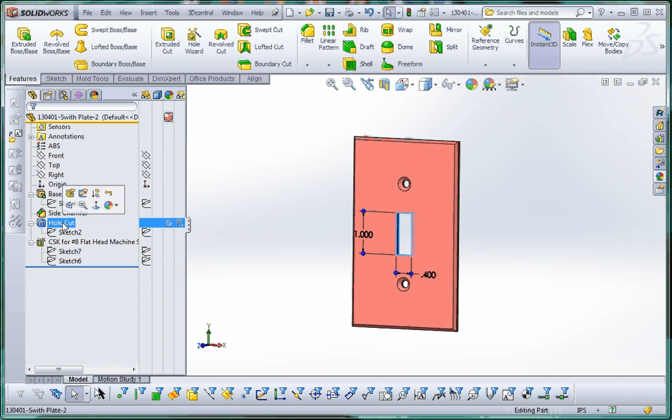And what we've done so far is we had our base, we had our side chamfer put in, our hole cut, which is going to be there where the switch actually comes out in the middle, and then we put in our hole wizard holes, which help define some of the holes and the screws that are going to be associated with those holes when we finally get this mounted.

What we need to do next is we need to hollow this out a little bit. It's always good when you're dealing with plastic injection molded items that there's a consistent wall thickness. That way it cools correctly and it doesn't provide as much in the way of warpage. So one way to do that is the shell feature. It's a very handy way of doing it.

What we're going to do is we're going to select the face and give everything else a certain wall thickness, excluding that one face that we select. So if we go to shell, by default it will go to 1/10 of an inch. But we're going to change that to 50 thousandths of an inch, or 0.05 inches.

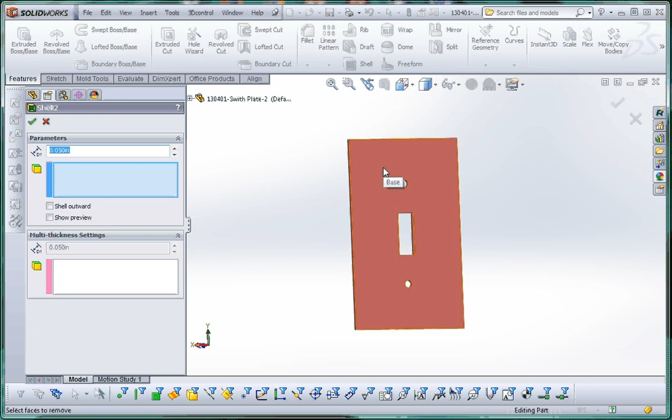The way you do it is you work your way from the top down to the bottom. This blue box, as you remember, is asking for a selection in our modeling area. So it's asking for faces to remove. We're going to take this face and we're going to remove it. And you'll see that there's an icon on our mouse.

If we right click on the mouse button, or go over here to the green check mark, it'll rebuild for us. And what that does is it shells out everything except for that face. So anything that protruded in that face gets a wall thickness, including our hole wizard holes and that center hole that we have for a switch, as well as the edges over here.

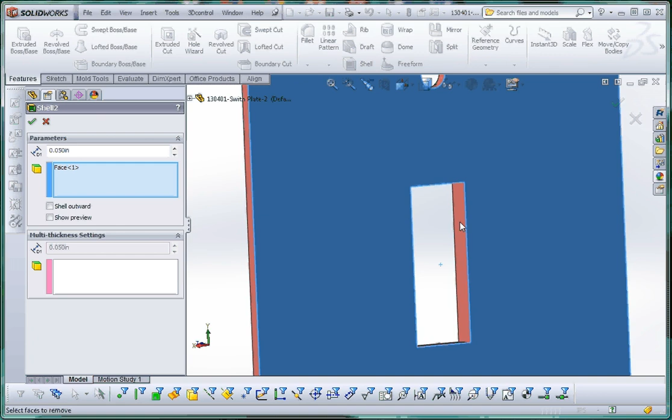Now, if we go back to this shell and kind of play around with it, we can select different surfaces in here. Not only that face, but we can maybe select this face, this face, this face, and this face, and maybe this edge over here, and see what the results are going to be. We go to the green check mark, and it kind of does what you would expect it to do.

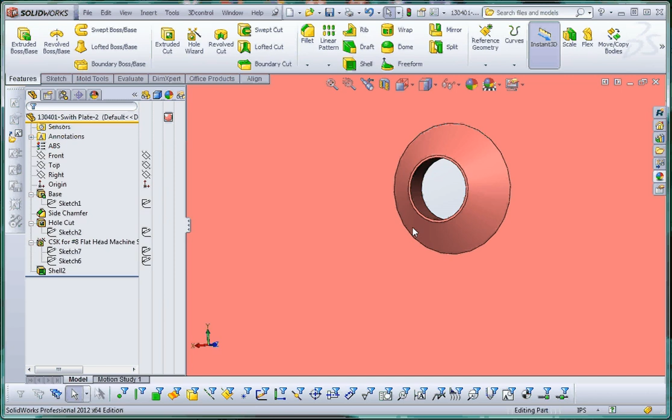It provides no wall thickness over here. It's just a straight through hole, and it only provides a short wall over here. It provides a kind of a wall thickness to the cut that we had there, all the way down to that point. And then down here, it gives us a full wall all the way through. In fact, that wall surface goes all the way up to the front plane, because remember, front plane resides right on that face, this face, and that face over here.

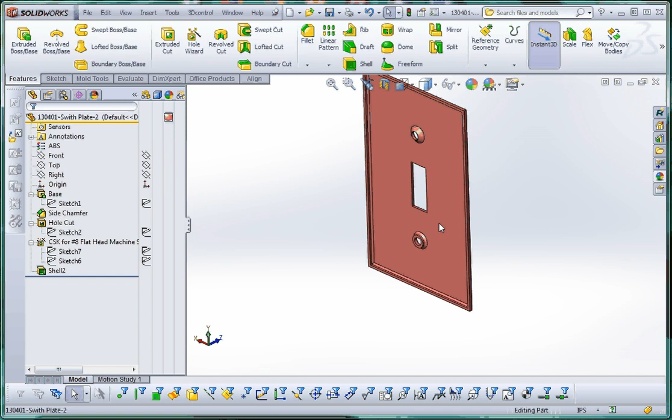So we can go back to the shell and change that one more time, just for the fun. Let's go ahead and remove one of these faces on that switch plate, and go back to rebuild and see what that looks like. Oh, I think we removed the wrong face. We want that face. So let's go ahead and reselect these, but not select all of them. Let's just select maybe those two over there and see what happens.

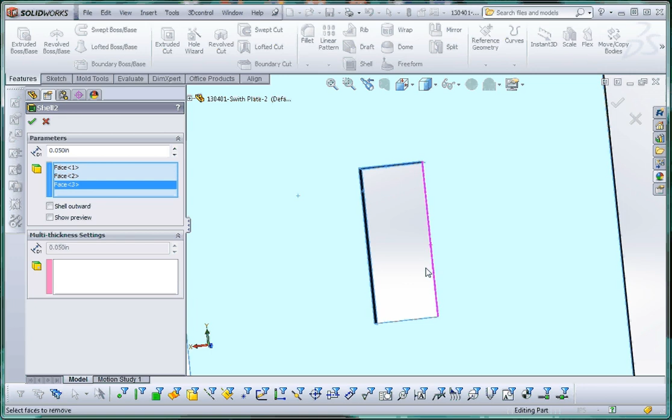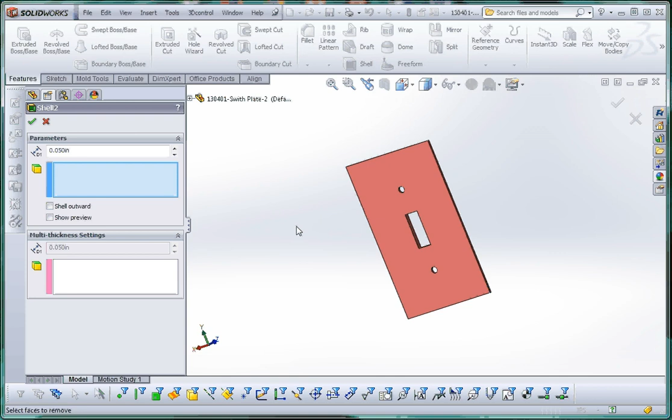Yeah, so kind of predictable. It does have a wall thickness on two sides of that cut in the middle, where that switch is going through, but nowhere else. The shell will provide you with various different options in here. If you want to clear some selections, right-click in that blue area, go to Clear Selections. Let's go ahead and reselect that and go back to our original setting. So last thing we want to do is we want to put in a rib.

So what we want to do is kind of put in a rib feature in here that'll go between maybe this boss over here to that cut, and maybe from this hole cut down to this boss, and then from this hole cut over to the edge, and the same thing on that side. The way the rib works, it's based on sketches, but you want to make sure you do your sketches first. So let's go ahead and do this.

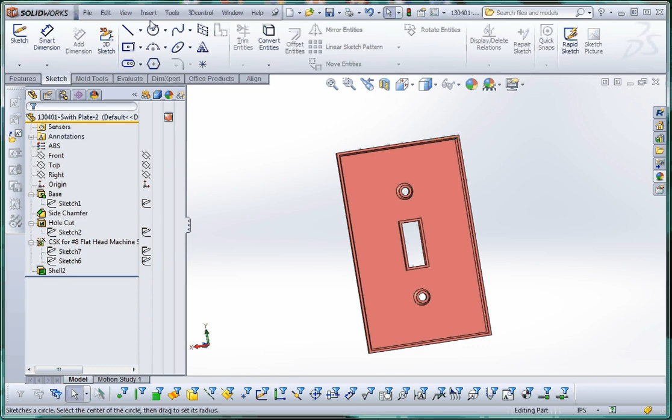Let's go to the Sketch tab and go to the Line command, and we'll just start drawing in some elements in here, some sketch elements. Now, there's a couple different faces we can choose. We can choose this face, or that face, or that face. It's all the same face, or we can go over here to our Feature Manager flyout and click on the front plane, because they're all about the same. They're all the same surface. They're all coplanar with each other.

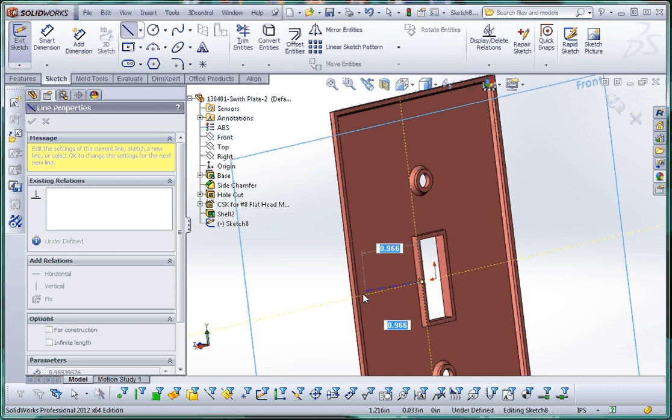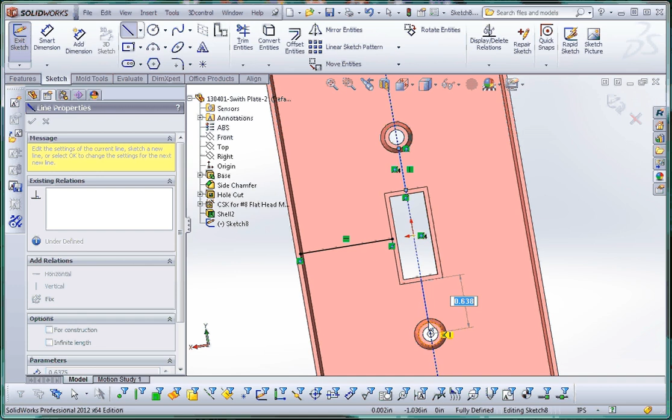So we can choose face or front over here, and we're just going to start drawing and sketching in some of these lines. We can use all existing geometry. For instance, we can go from maybe the midpoint of that rectangular cut, that hole cut as we called it before, and go up to that edge of that circular feature. Again, we'll do the same thing on the bottom. So we'll go from the midpoint of that hole cut, and we're going to come down here to that edge.

You can't really see that very well, but when you're making a pre-selection, when your cursor is resting right over that edge, it's going to turn orange and let you know that you're going to be selecting that. And we can establish that relationship down here too. You notice that right next to that, it's going to be hard to see, but in yellow you have a suggested sketch relation which is going to be created when you finally drop that line into place.

So if you think about these lines we've drawn in, we haven't drawn any dimensions in here, but the lines are fully defined. They're fully defined because the element that's just below that is fully defined too. And that's fully defined, and you put your elements in there that follow that, like our sketch elements in here, considering some of the geometry that's already existing there. Because the base element is fully defined, our sketch elements are going to be fully defined too.

So one last line, let's go from this midpoint over here to that midpoint over there, midpoint of that edge to the midpoint of this edge. Now we should be in pretty good shape. And just to demonstrate something down here, you notice that our sketch 8 down here is going to have a negative sign to it, which means when we initiated this sketch it was underdefined, but it will be fully defined if we rebuild this. So let's go ahead and rebuild this. Sketch 8 now becomes fully defined, and every sketch we have associated with our model so far is fully defined.

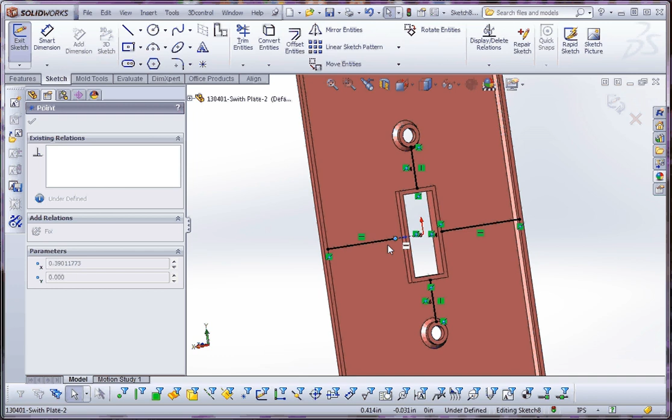If it's not fully defined, that's a test question. If it's not fully defined, it will have a negative sign to it. And if I were to take that relationship off and still have that blue dot at the end of that line, if I go ahead and rebuild that, underdefined. Right click on that, go back to edit sketch, just drag that back over here. It will now be fully defined, rebuild, and now we're in pretty good shape. Okay, let's go to rib.

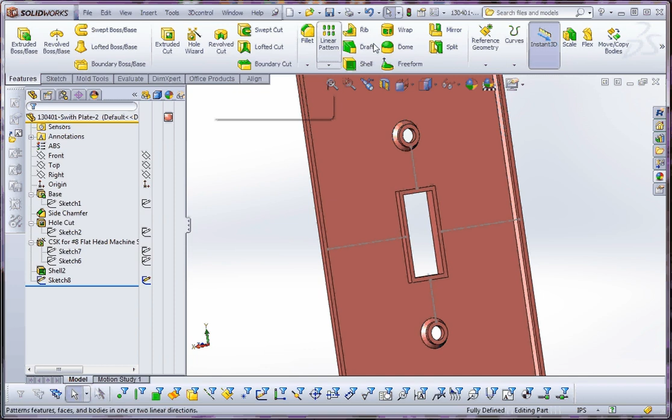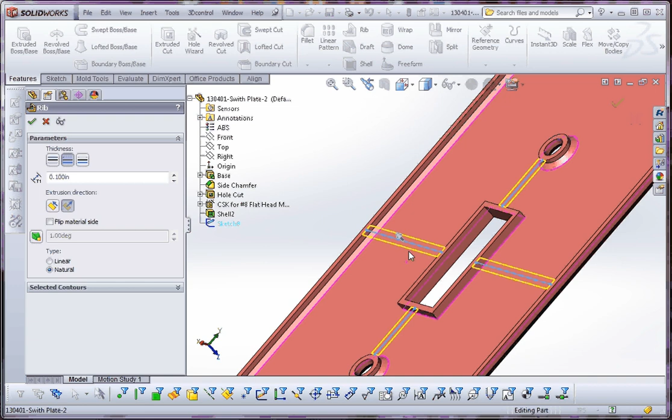Feature tab, rib, is going to be looking for a sketch. So we're going to click on one of our sketch elements over here, or scroll down to sketch number 8. And the first thing it's looking for up here is an orientation of that rib. And the way a rib works is you're going to provide a thickness of that line, and then the lines are going to go down or up to wherever the next selection is going to be. So right now it's pointed up, so it's going in the wrong direction. It'll fail on us if we try to do that.

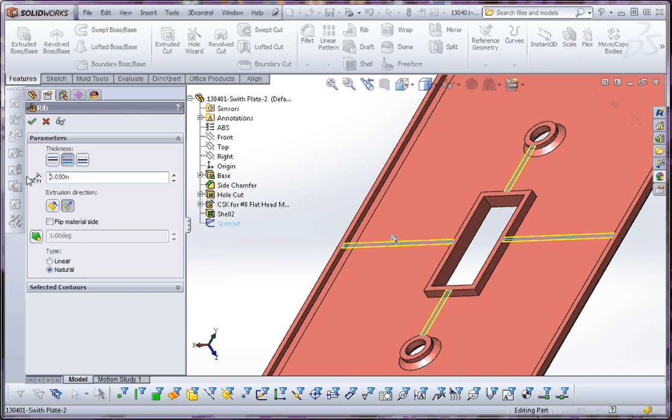But you also want to keep in mind your thickness and orientation. So our orientation, we do want a middle orientation here, so we want just as much material on one side as the other. You can see the yellow preview of that, how thick that's going to be. But we're going to make that a little bit thinner. We're going to make that 0.05 inches. And you'll notice that the preview of that changed too. That's what we need to identify up here.

We're also going to make a draft to this. Now typically in the plastic part you want to put drafts in. We didn't put drafts in on our shell. Now we'd have to do that as a separate element. That's a separate feature. But we're going to do it here just for practice. And maybe about 3 degrees. So what it's going to do is it's going to have its original thickness up here, and then it's going to get a little bit thicker on the bottom by 3 degrees.

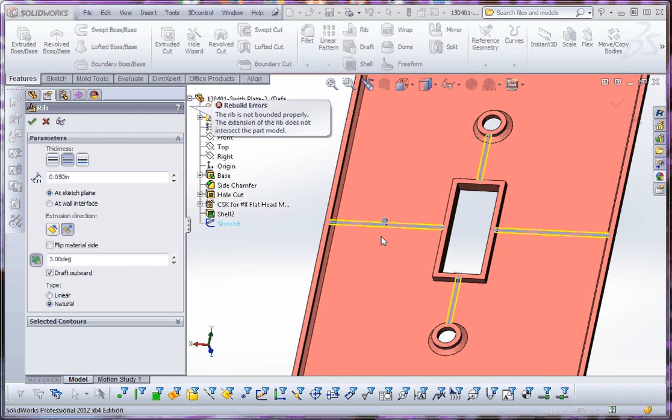And if we do that, I go to the green check mark. As I promised, it is going to fail because it's not going in the right direction. What it's looking for is it needs to take that rib and go down to another surface. It needs to terminate at another surface. So we can change our direction by clicking on this button. Parallel to sketch. Oops, not that button. Sorry about that. That will actually change its orientation too. So it'll go off in this direction or in that direction over there.

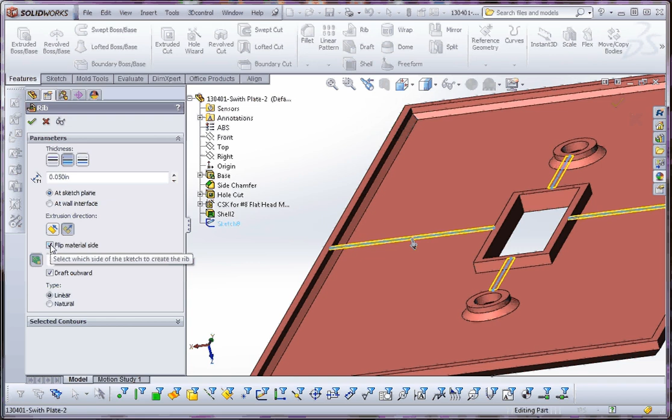That's not really quite what we want, so we're going to go back to the orientation, but we're going to flip that. So we're going to flip the material side. So this is the button you use. A lot of times when you're using these features, you'll have a reverse button right next to it. It's a little bit different animal with a rib. So we want to flip material side. And now if you go to the green check mark, now you see our rib. And if you look at it from the top, you'll notice it does have a little bit of a taper to it. It does have that draft.

So that concludes our model. That includes everything from our base feature to our side chamfer, our hole cut in the middle, to our hole wizard holes, to our shell on the back. And we'll call that our back shell. We're going to go ahead and rename these. So our rib 2, since we already played around with that, sequentially gave us another number there. But we're going to call that also our back rib. And since it's more than one rib, we're going to make it plural. So that concludes our model.

There's going to be one more video, a real quick video. We're going to show you how to put all these sketch elements into one sketch in order to help you drive all the features of your design.